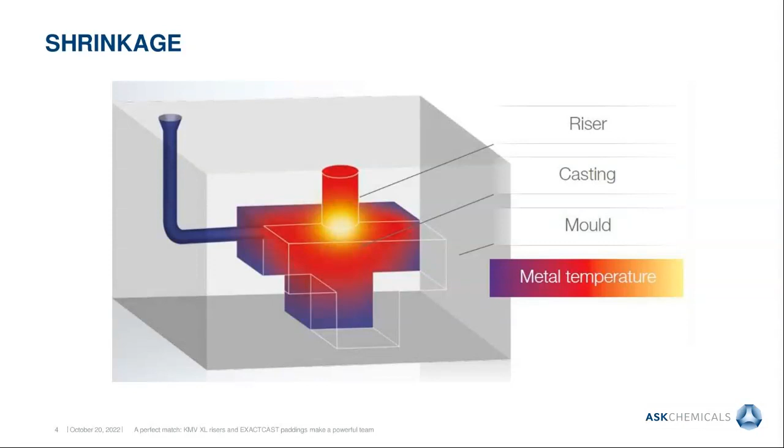So to begin with, going with these basics of riser technology, we have to consider these risers or feeding devices as part of the mold, together with the casting and the metal temperature. This metal temperature is one of the key influencing factors when talking about any feeding device. And here in this graph, we can explain how this temperature has quite an impact on these feeding issues.

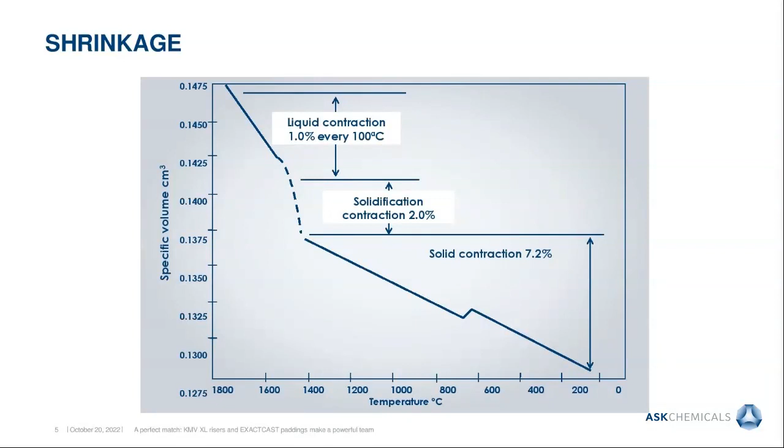So here we can see the thermal curve of low carbon steel. During this solidification process of this metal, we can identify three contractions. First of all, we have the liquid contraction until the liquidus point. Then we have a solidification contraction. And then at the end, we have the solid contraction. In the end, when we are talking about feeding devices or risers, we are just taking into account that we are trying to solve the volumetric defects called shrinkage only in the solidification contraction process, just in the middle of this curve. Each metal has its own curve, so it's important to understand how each metal has its cooling curves.

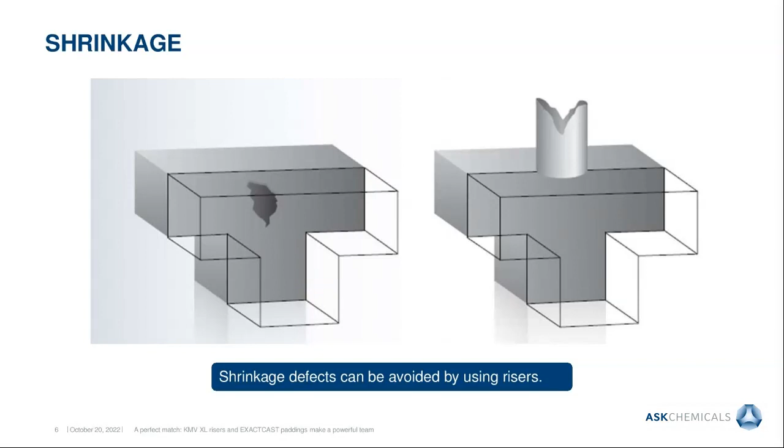So the use of these risers or feeding devices is just to compensate this shrinkage that, in case of not using any kind of extra material or feeding devices, we'll have these void areas or shrinkage defects in our castings.

Talking about the EXACTCAST KMV XL technology, it's important to know this technology has two important aspects. One is the insulating capacity of the material, thanks to a special raw material with very low density that provides this insulating capacity. This is not the only property, because KMV XL technology also works with exothermic power. So both combined, the insulating capacity together with the exothermic energy, give a very good performance.

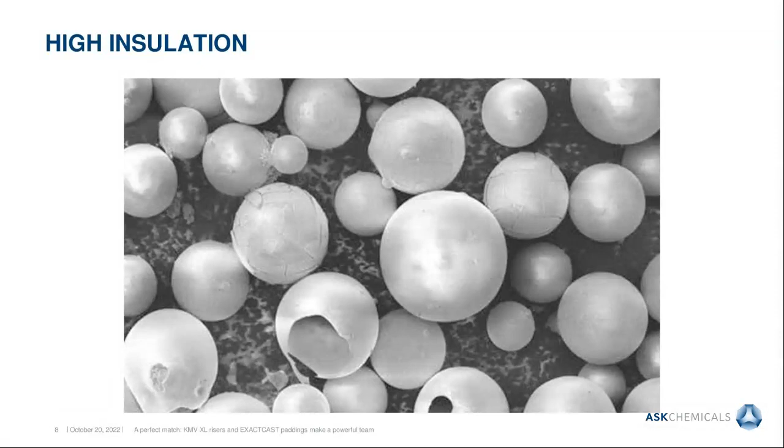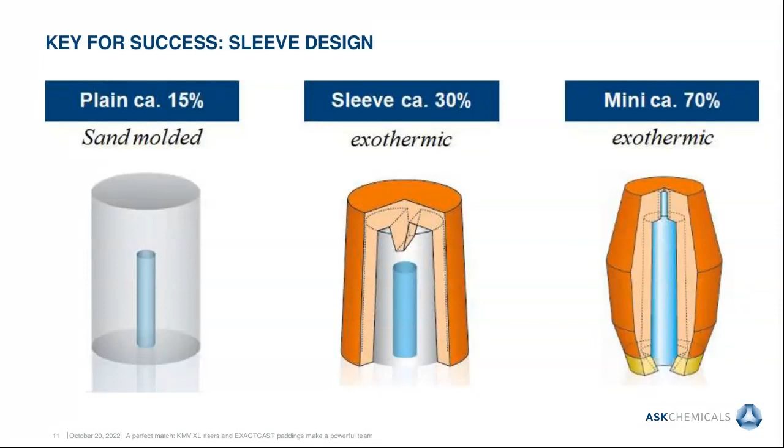Together with the material, we also have to take into account the sleeve design as another key point for the success of these products. If we compare the performance of the natural riser out from the mold to a mini riser, like the one we see on the right, the performance difference is quite big when we change the geometry and add this covering material to the feeder, having both properties, exothermic and insulating capacities.

Once we understand the basics of this technology, we are ready to cope with the main challenges that customers at the foundries have nowadays. One of the most important is volume savings and yield optimization. This is not only to improve the process of the foundries, but also because in the current situation in Europe with raw material increases, energy costs, etc., this is really an important point that foundries are suffering. So all these changes from traditional feeding systems to the new KMV XL technology will bring foundries the possibility to reduce the feeding systems with great success, without compromising the quality of the castings.

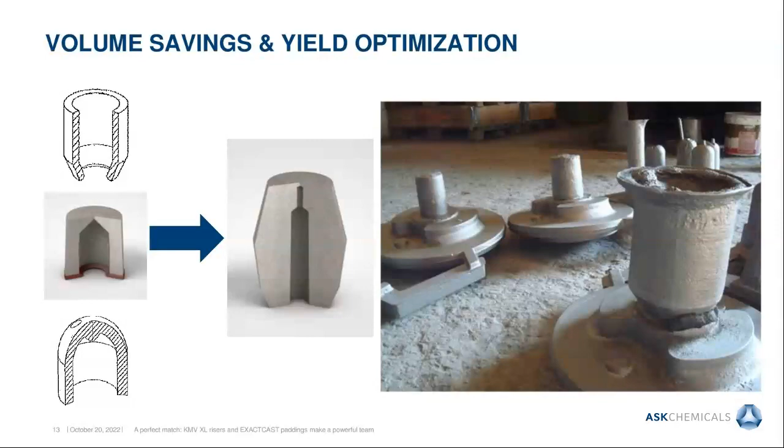Also, thanks to the development of different formulations for these KMV XL risers, we have the possibility to solve and reduce fluorine defects on the surface of castings. This is mainly due to the accumulation of this particular component, fluorine, in the sand circuit, and not having fluorine in the formulations gives the foundry the possibility to reduce these defects.

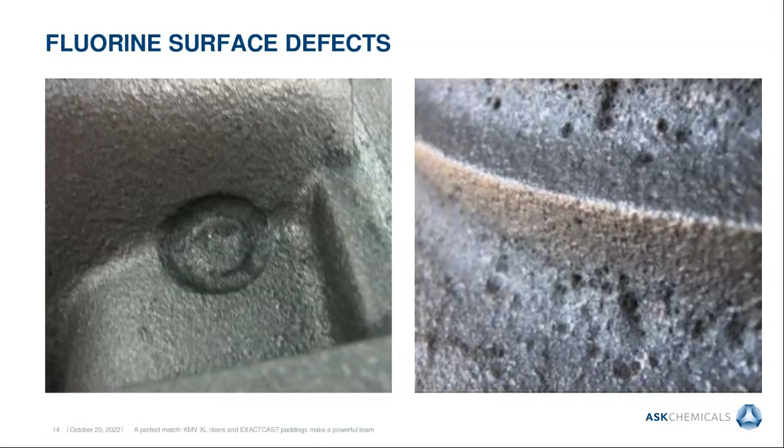Also related to the fluorine content, graphite degeneration is also solved when not using fluorine in the recipes of the KMV XL risers, but these problems can also come from excess exothermia. As mentioned at the beginning, KMV XL technology is also based on insulating capacity. This means we don't need extra heat sometimes to keep the metal liquid inside the riser, so this insulating property in the material can also be beneficial regarding graphite degeneration.

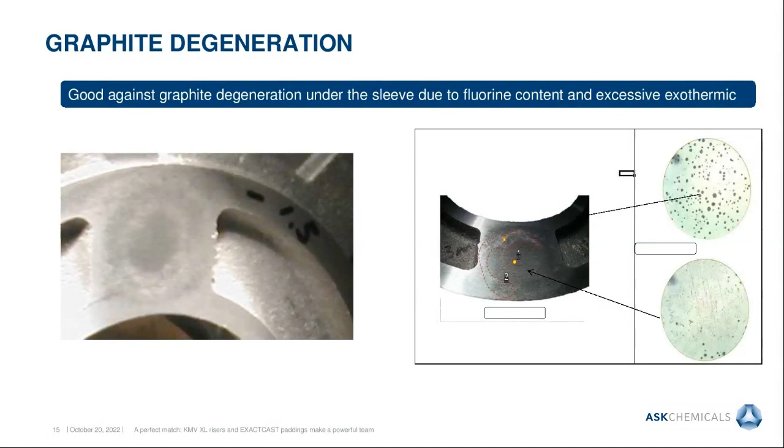As mentioned, reducing the volumes from feeding systems and going from traditional feeding solutions to KMV XL with less volume, we also have the possibility to reduce the neck sections of the feeder and the casting. These areas show a lot of differences between a traditional feeder solution and the KMV XL riser. For example, with traditional systems we have wider necks, and in those areas we will have longer solidification times, resulting in a grain size quite different from what we get using KMV XL risers with smaller necks.

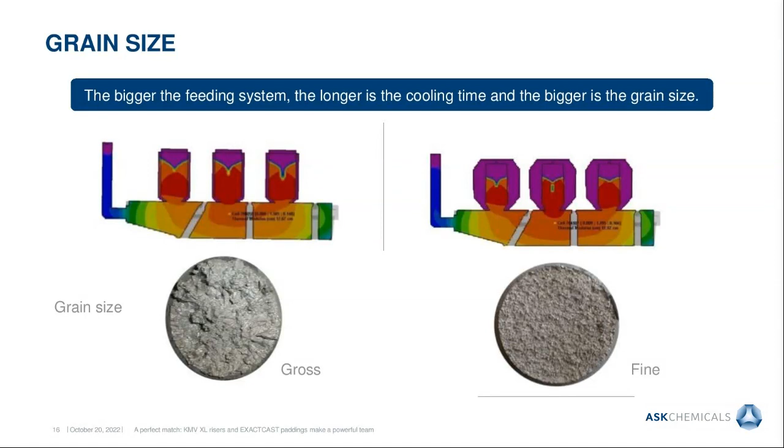In the end, with traditional solutions we will have a gross grain size, which is a matter of quality - having this gross grain size increases the likelihood of cracks when machining. So this is quite a quality advantage of using KMV XL risers.

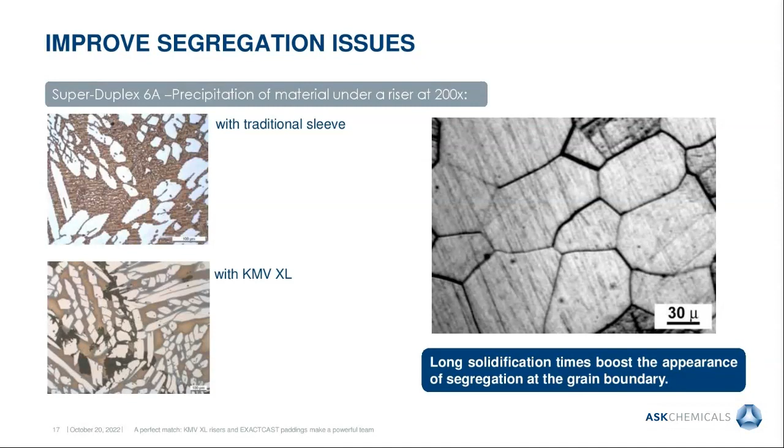Also, these products have some environmental improvements. The KMV XL risers are fiber-free products, so there are no harmful fibers in the recipes. We also have the possibility to have formulations with no fluorine, not only due to quality aspects, but because accumulation of this component in waste disposal is more difficult to handle, costs extra for foundries, and isn't good for the environment. So not having fluorine in the recipe is also good for the environment.

Also, the residual material from the risers, once burned, is 100% reclaimable. So we have no problems including these materials in the sand circuit, although due to the low density of this material, part of it will go away through the aspirations during the cycle process.

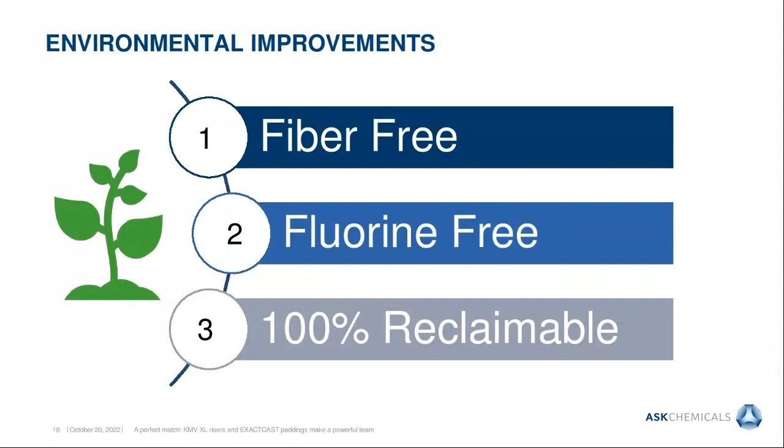Now we will go through the paddings, the EXACTCAST paddings, which take into account all this KMV XL technology. In the end, the padding is defined as a freely moldable material, like a customized piece of material with the same technology as the KMV XL risers that enables directional solidification and also lets the foundry increase the feeding distance.

We can identify in the picture on the right the blue and yellow cylinders as the riser feeder and sleeve items. The gray plate would be the casting, and in this case the green part would be the padding. We have to imagine that the padding has the same properties as the riser. So in the end, we can understand this padding as a material that can ensure feeding of the bottom area without changing the actual geometry of the casting.

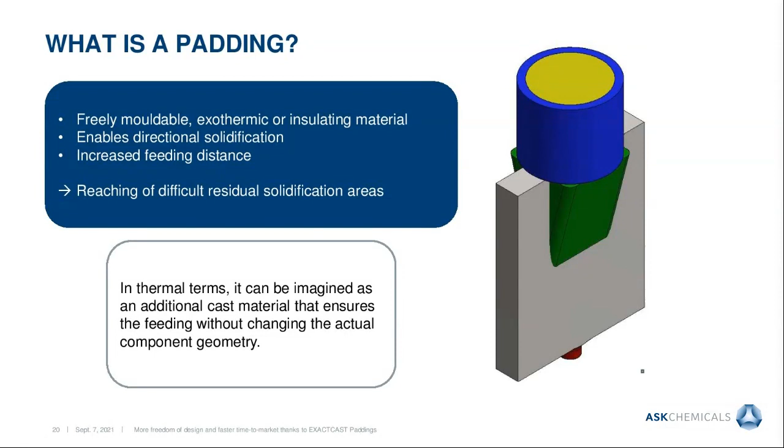So there are several reasons for using a padding. This is quite a creative product. In the end there are many reasons, but here are some. We can have insufficient feeding distance, so having a padding designed accordingly could improve this feeding distance.

We can also have difficult-to-access residual solidification areas, maybe due to the geometry of the castings. There are some spots not easy to feed through risers placed on top or lateral feeding devices. In the end, the padding can solve these feeding needs in spot areas. Also, another reason is the one we already mentioned: being able to feed a casting or a certain area of it without changing its geometry.

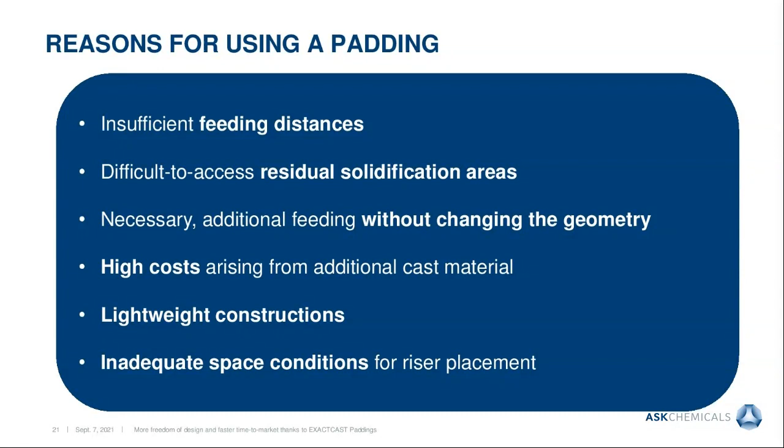Also, if we want to avoid the extra cost of adding material, not only because of the cost of the material itself, but also because afterwards you have to remove it, resulting in fettling and cleaning costs. Another reason could be the need or desire for lightweight constructions, or maybe not enough space or good space conditions for placing risers.

So here we have one example of using a padding. The idea was to keep the original shape of the casting, to be able to feed the whole casting without changing the original geometry. In the standard layout, there's a traditional feeder with an enlargement of the casting section to have enough flow and feeding distance to feed the bottom part. When designing corresponding padding for that area, we were able to keep the original shape of the casting, and of course we could save a lot of hours of cleaning and fettling costs.

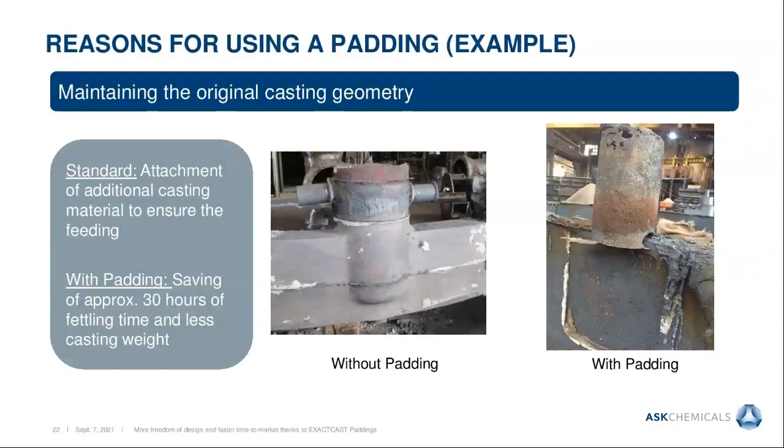So the advantage of using a padding is, first of all, flexibility. As I mentioned, this is quite a creative product with a high degree of geometric freedom. It can be adapted to any shape of casting, letting the foundry avoid any changes in the original component. These paddings, sharing the same technology and properties as the risers, can also be combined with KMV XL risers, and can also be used in core sections.

Talking about efficiency, these paddings are really easy to produce. They can be produced in the foundries. It also brings the possibility to enlarge the portfolio of the foundry. And most importantly, the possibility to feed these difficult areas. From the economic point of view, we have a clear yield improvement when using these paddings. We save cleaning and fettling costs due to the reduction of extra parts or materials needed with old designs, and we can reduce the weight of the component.

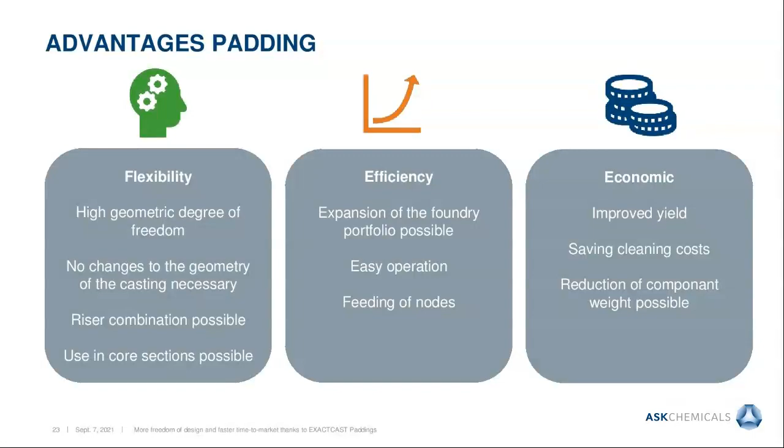So now we will explain how both the EXACTCAST KMV XL and the paddings are really a perfect match. The reason for using these two products together is because we can benefit from both technologies, both properties, and in the end we can apply a really premium solution to high demanding castings in terms of quality and yield optimization.

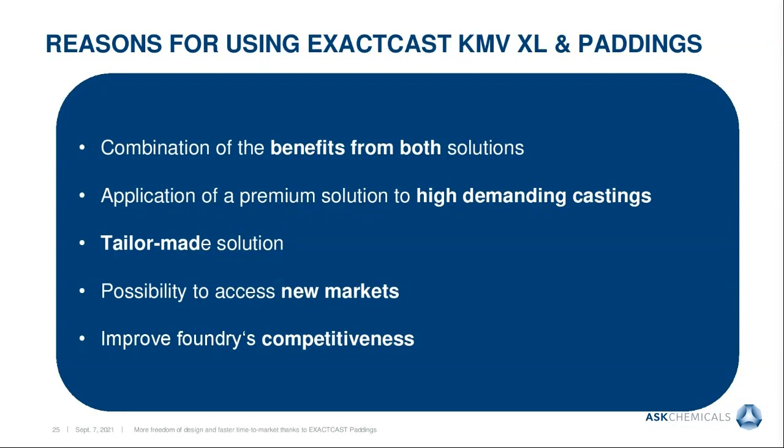This can have a tailor-made solution for each casting, each section, or each application. In the end, it has a lot of freedom of design. The combination of both technologies can also let the foundries access new markets, and this will improve the foundry's competitiveness.

The advantage of the use of this perfect match, the KMV XL with the paddings, is first of all a flexibility matter. These customized assemblies really fit the needs of each casting.

This is really a premium solution in terms of quality. We are using the most optimized solution for each foundry and each casting. We can have this tailor-made solution together with the design. We can also apply this to spot areas, really having the best results. And in the end, we will have the possibility to access new markets.

Talking about efficiency, compared to other feeding systems, we can increase the feeding performance. It's important to know that both KMV XL risers and paddings have this double performance in terms of exothermic and insulating properties, so in the end this will have huge performance. This will increase the feeding system distance, including the riser together with the corresponding padding.

And from the economic point of view, we are able to reduce the cleaning operations and improve the quality of our castings.

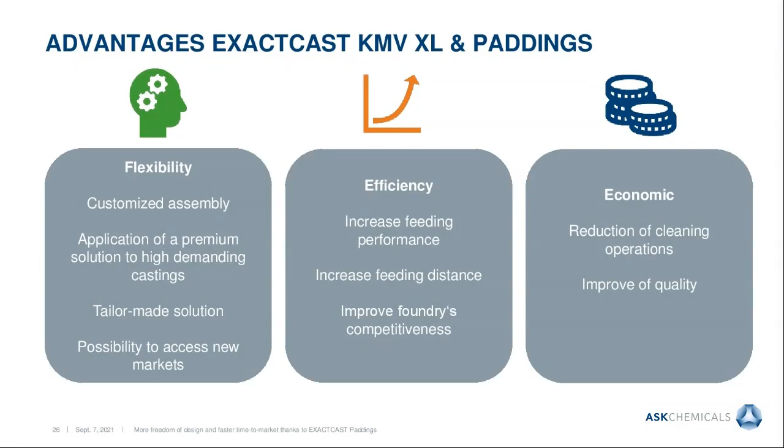Now we will go through some success stories that can support these theories.

First of all, we have a first case study consisting of a super duplex casting of 900 kilograms and 3 positions of risers. The original design was a traditional feeder design with a volume of 4.5 liters. In this case, the solution proposed was to use a KMV 2565 with 2.5 liters.

Once the casting was checked and everything was okay, the foundry was able to have 45% of feeding savings. Per casting, they were able to save up to 50 kilograms. In the whole series, all the savings was quite interesting, taking into account that we are talking about the super duplex alloy, which is quite an expensive one.

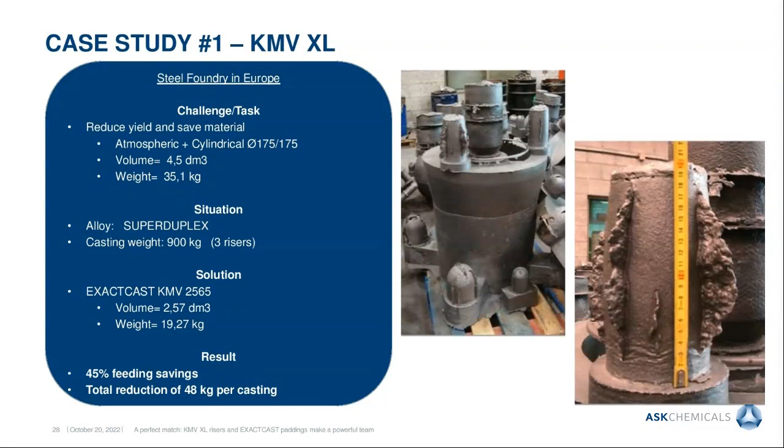In this second case study, we are also talking about a steel foundry in Europe. In this case, the casting was a manganese steel one with a total weight of 1.6 tons, and the layout consisted of 10 riser positions.

In the first trial, we wanted to make only the change of one of the positions, from the traditional solution consisting of a neck down with 90 kilograms to the KMV 2565 with a total weight of 20 kilograms. In the end, the results were great.

And when changing in the following pourings all the positions with this KMV XL technology, we were able to save almost 700 kilograms per casting.

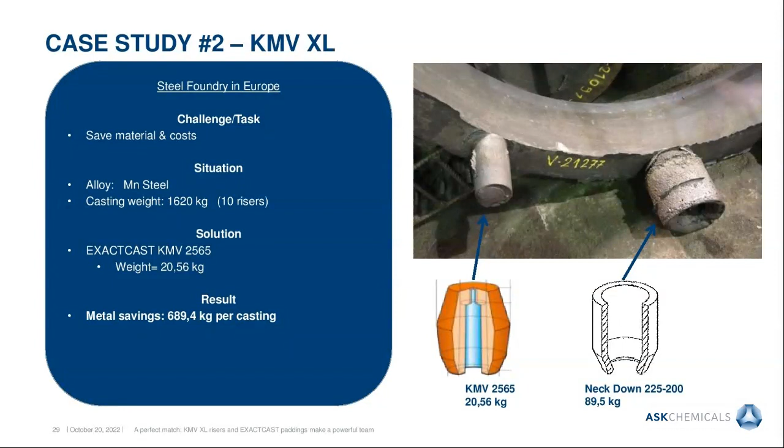In this third case study, we show you the combination of the KMV XL risers together with the paddings. This trial was made in another steel foundry in Europe. This one was a low carbon steel casting with a gross weight of 18 tons.

Again, here they have like 10 positions of risers, and those risers were a KMV 34,500. This means that each riser had 34.5 liters of metal.

And together with the risers, some paddings were designed to have 2 functions. First of all, to increase the feeding distance and be able to feed the lower part of this ring. And the other function was to help the positioning of this big riser on top of the ring.

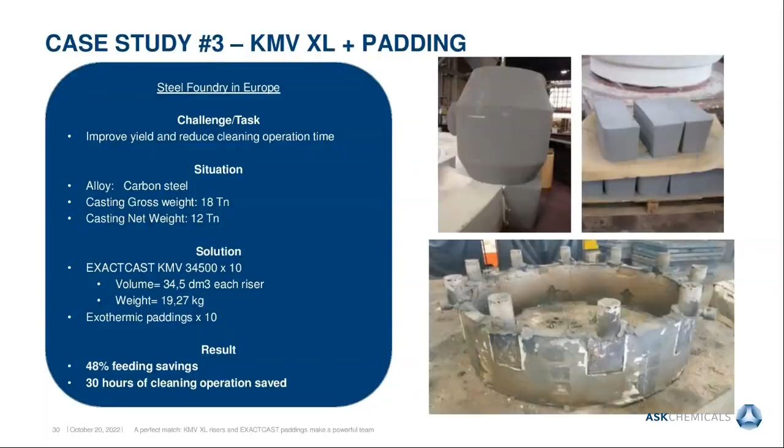So now we will go through the conclusions before we end this webinar.

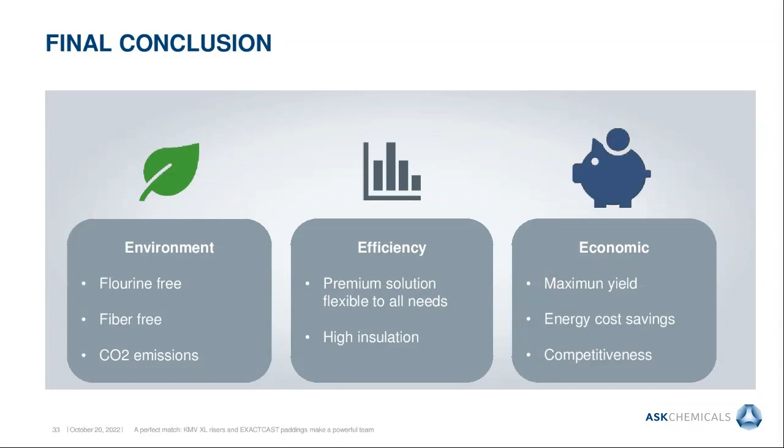So I would say thank you, everyone.